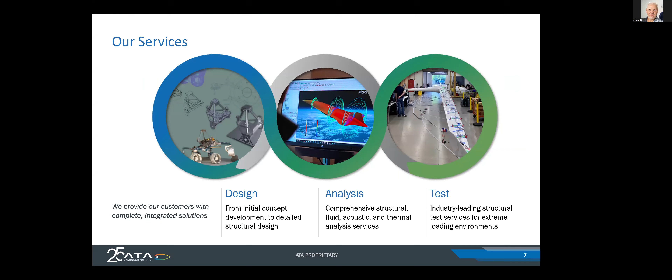And so what do we actually do? Well, we do design, analysis and test at the highest level, and that is how we end up using so many Siemens tools, because they really fall into all of those buckets of usage. We also do a large amount of test services. Ground vibration testing is one of the major areas we focus on, but many others: aeroelasticity, acoustics, lots of flight test work. We have a large test team that will either do it locally or travel around the US and the world, in fact.

And this is an example of a test glider that was actually instrumented in the ATA offices in San Diego. And it was interesting because it actually didn't fit. It had to go through the other door to actually get it in the building.

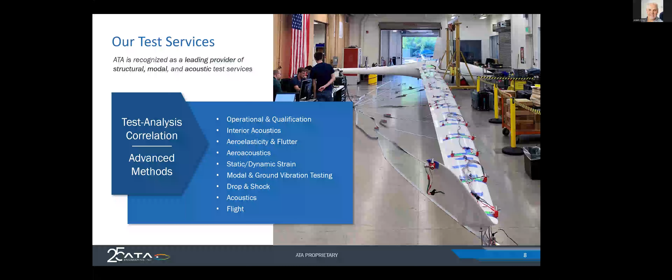So test is a large part of our business, and really was part of the ATA original work that was done when they were within SDRC. But you can imagine that doing all of that, we use a lot of Siemens software, and we've become expert at using it. And so we sell it as part of the VAR business with Siemens. And we also have a lot of people in-house who are experts at it.

So SimCenter 3D, FEMAP, Nastran, STAR, HEEDS, and AMESim, all of the SimCenter tools, together with NX and SimCenter 3D and TeamCenter are all SimCenter products that we support at a very high level within the Siemens group. And really, certainly on the STAR side, we have the most, I would guess, of any of the VAR partners for support. So we have a lot of depth on our bench to really give our customers great support when they're using the SimCenter tools.

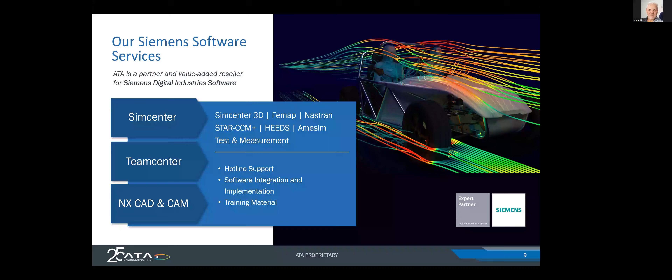So with that, let's move over to our subject matter today, and that is optimization of TPMS heat exchangers in STAR-CCM+ using NX and HEEDS. And so this has come about from customer requests over the last few years of how they can optimize TPMS heat exchangers. And for those who are familiar with that, I'm sure most people on the call are, otherwise you wouldn't have attended,

but they are basically heat exchangers that are very complex in their geometry, but because of 3D printing and additive manufacturing, they can actually now be manufactured. Perhaps 10 years ago, it wasn't possible to manufacture them because of the complex nature of the geometry. But now with additive manufacturing, we can, and hence that gives us new challenges for design. It opens the playing field for much more scope in the design, and hence using NX and STAR and HEEDS, we can really explore that field much wider to get optimized designs.

And so, starting with the basics, I'm sure everybody knows this, but NX is predominantly CAD with some add-ons for analysis and so forth. STAR-CCM+ is CFD, and HEEDS is a product for optimization and workflow automation, and it's really the glue that holds the first two together in this case. And so when we look at NX, why is NX ideally suited to this? And going back a little bit, STAR-CCM+ has its own geometry engine. And hence you could almost do a lot of this work without using NX, just using STAR and HEEDS together.

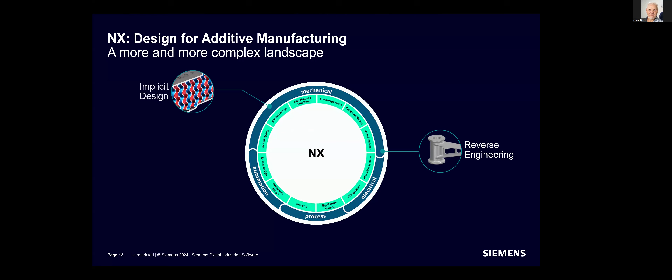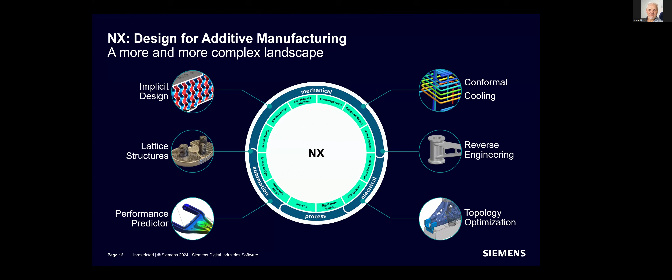So when we look at NX as part of this, you can see that the actual pieces within NX for the design for additive manufacturing really make it ideally suited for this case. The implicit design on the top left, if you had something more complex with lattice structures, you could add that. But really, it's the implicit design and the way that the geometry can be parameterized that makes NX ideally suited for this challenge. And STAR-CCM+, it's the premier CFD tool globally, and I don't think it really needs any explanation except that its capabilities let us do all of the physics in this heat exchanger problem.

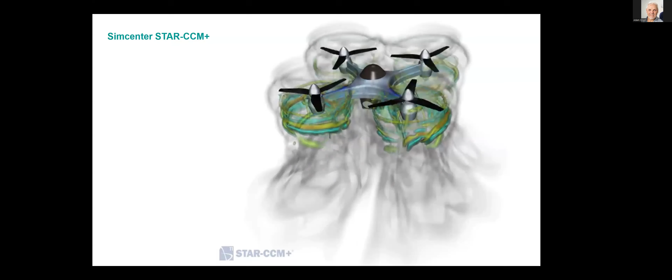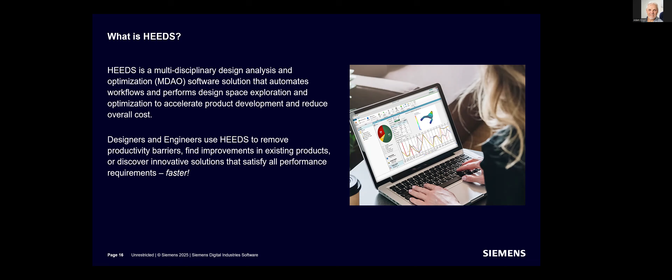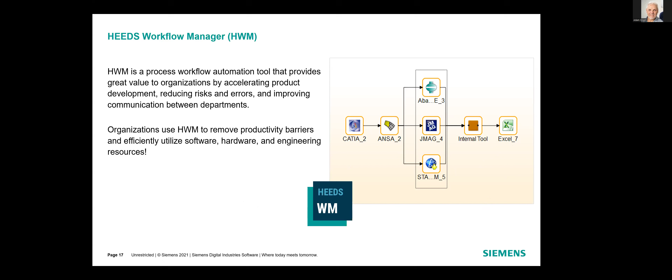And then it can repeat the workflow. It can run this 100 times, 1,000 times, whatever's needed to get to a result that it feels is better. And so when you look at that workflow image, you can imagine that HEEDS can talk to every product on the planet. Not quite, but it can talk to a lot of them, mostly CAE tools. You can see there's ANSA here, there's some Dassault tools, a lot of Siemens tools. Really any tool that is doing analysis, HEEDS can talk to using its own API.

So if you want to control SolidWorks geometry that's going to go into, say, STAR or any CFD tool, HEEDS can control it. So it really opens up the way you can design these things. You don't necessarily need to be a full Siemens house to be able to use HEEDS to wrap around your workflow, and it really makes it very flexible. Those all sound like grand things, but let's look at a quick example of how that might work.

There's a company in Europe called ZF, pretty famous for automotive things and gearboxes. In this case, they were looking at this control arm for a vehicle. The goal was: we've got the CAD geometry, how do we make it as light as it can possibly be, but still satisfy all the load criteria? So obviously automating this to create the right geometry and the right physical status is key here, and doing it as fast as you can.

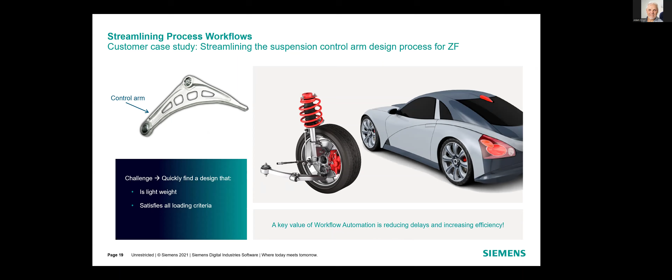So when we look at the flow, the OEM requirements came in. In this first box here, 10 parametric slices were created in the geometry, and those parameters are controlled by HEEDS. It goes into the geometry creation from there. The FE mesh and loads, linear stress, nonlinear, and fatigue analysis are all done as part of the HEEDS workflow until it comes up with a design that is as light as it can be, but still satisfies all of the load conditions in these various simulations.

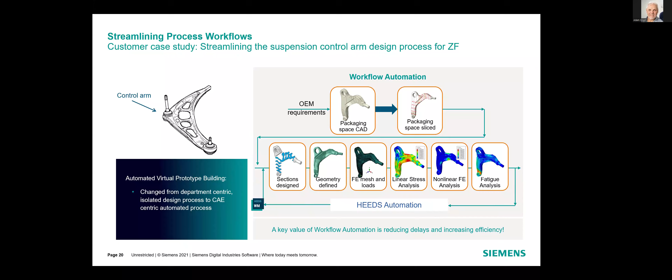So this is quite simplistic. It's one part, and it's really doing FEA but extended, but it still highlights the idea that HEEDS can loop around basically any analysis loop and do things faster than you can do manually. If we look at the result, HEEDS evaluated 1,375 designs and got to the lightest and strong enough piece in under 4 weeks. It was estimated that ZF would have taken over 6 months to do it as a manual process.

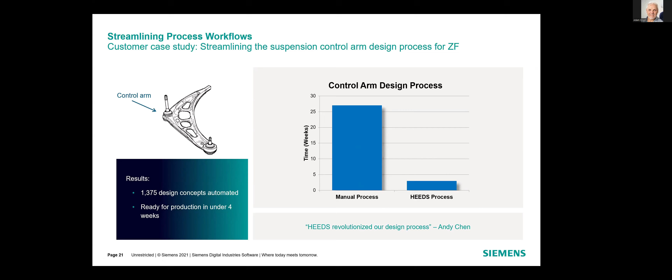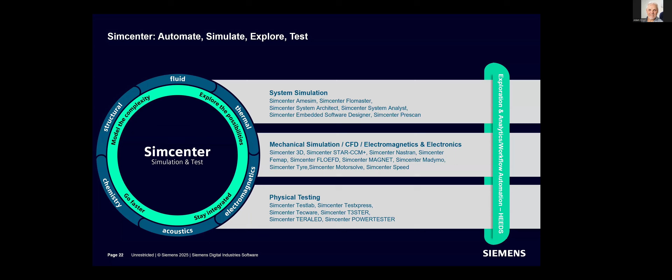So it really highlights the point that, first of all, HEEDS can help you explore areas that you really couldn't get to doing a manual process, and also it can just do things much, much faster. On the Siemens Simcenter side of things, HEEDS can reach across pretty much all domains, from system simulation to mechanical, CFD, and electromagnetics, all the way through to physical testing. So it's interesting to think about which combinations could be effective for any of our clients.

Lastly, when we look at which pieces of HEEDS make it valuable, this first piece of process automation is very valuable because it takes less time to do more iterations around a design loop. Efficient search is the optimization strategy. It lets you home in on the lightest, strongest piece available, and it has all of those algorithms built in. They are tunable if you want, but they're also automated so they just work straight out of the box. They're hybrid; they tune themselves as they go, so the efficient search methods are very good at producing answers without becoming an optimization expert in your own right.

So that's very effective. And then these last two on the right here are almost expected nowadays. Distributed execution: HEEDS can manage clusters, it can manage the cloud. If you want to send 100 jobs to an AWS instance, HEEDS can manage that for you, which is very convenient in this modern day and age. And lastly, the results give a lot of graphical representation, so you can dive into the different parts of the model that govern the result, see why something was better or worse, and move on to deeper analysis if you want to.

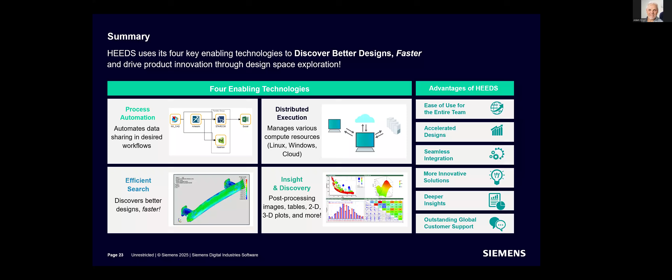So with that, Chris, I'm going to pass the ball to you to talk about using that style of workflow for looking at TPMS heat exchangers. All right, thanks, Adam. Just going to pull the share over from you.

Adam, I sent you a request to share. Can you check to see if you have a little notification there? Yes. I think I'll just stop my share. Okay. There you go. You got it. Great, thank you. Great, okay, can you see my screen? Yep. All right, well, yeah, thanks, Adam.

My name is Chris Stoich, and I'm going to present the optimization of TPMS heat exchanger in STAR using NX and HEEDS. I want to give credit where it's due. Most of the work here was done by my colleague Evan Halls, and I just get the privilege of presenting this cool work.

So yeah, over the past few years, there's been a lot of technological advances in 3D printing, and it really allows the manufacturing of very complex geometries, which is great for heat exchangers where you do want to build something that has these tortuous fluid paths with a lot of surface area. In particular, what we're going to focus on today is the ability to 3D print these triply periodic minimal surfaces, or TPMS, heat exchangers. So I've got a few examples of different types of TPMSs on the right there.

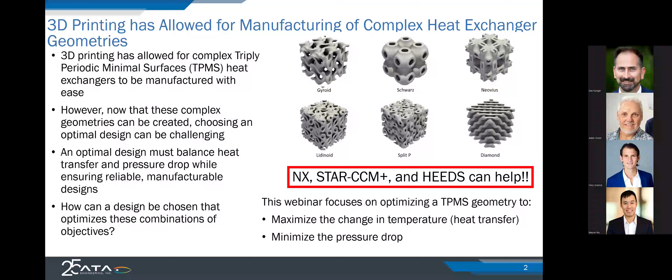So the story starts with NX. Adam alluded to the fact that NX allows you to produce these TPMS geometries using its implicit modeling tool. And it does this with just a few different parameters. So in this case, we've got cell size, that's the size of one of these repeating cells in this lattice geometry, and then wall thickness, and then you've got a number of different types of geometries to choose from too. The one that we're showcasing here is the Schwarz type. And then also you define a bounding box that's going to say how large this array of cells is going to extend.

All of these parameters can be exposed as parameter expressions, which can be used down the line in the optimization. And then as shown on the right here, we've got these hot and cold fluid inlets, and those are created by just using Boolean operations and subtracting those straight fluid streams from the fluid streams passing through the TPMS.

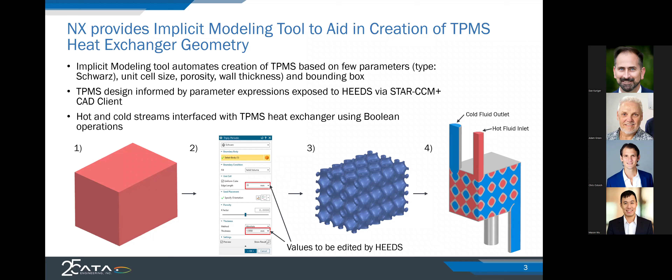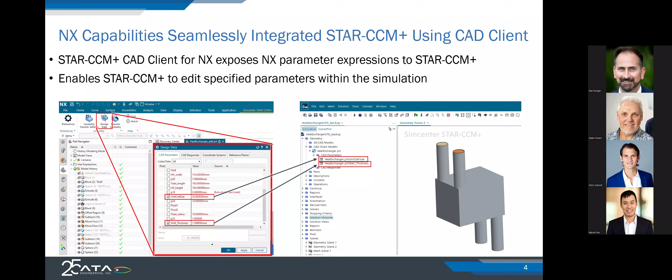So now we move on to STAR. STAR is a multi-physics solver that has everything under the hood. It's got CAD, meshing, a large suite of high fidelity physics solvers, and powerful post-processing tools. In this case, we pull in that NX generated geometry, and STAR's automated mesher builds a mesh on it, creating node matched interfaces at the fluid solid interfaces to accurately capture heat transfer for the conjugate heat transfer simulations. We're using polyhedral cells within the volume, and a number of prism layers on the solid boundaries to accurately capture the temperature gradients there.

As I mentioned, there are a number of multi-physics capabilities. Here we're using RANS steady state flow predictions coupled to the solid thermal predictions in this high fidelity conjugate heat transfer approach. And then there are a number of powerful post-processing tools. In this case, we're setting up reports to measure the temperature change in each fluid stream, the pressure drop, the associated heat transfer, etc. And then we can also look at scenes to really visualize the fluid flow and gain some insights into what is going on inside this complicated geometry.

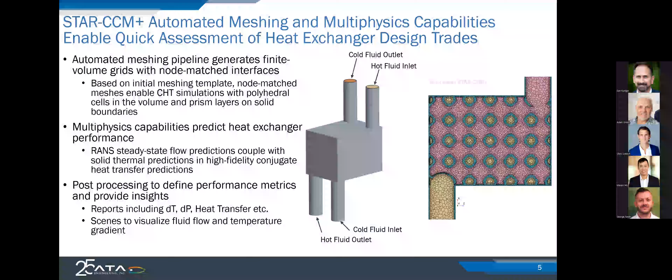So STAR allows you to parameterize pretty much anything. All the fluid inputs are parameterized. So in this case, it's pretty simple. We've got two streams, so we've got the flow rate and the temperature for both of those streams. Also exposed to STAR, as I mentioned, are the CAD parameters through the NX CAD client. So in this case, we're varying that unit cell size and also the wall thickness.

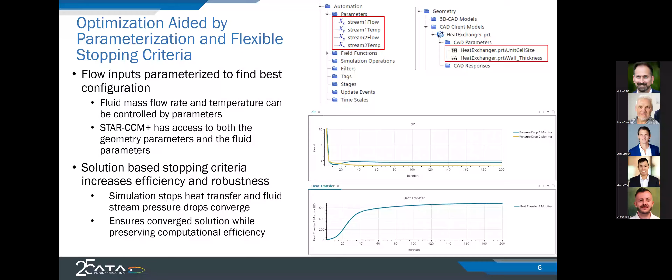Okay, and so we've gone through NX and STAR. HEEDS kind of controls all of this. HEEDS will orchestrate this intelligent design space exploration really by just interacting with the parameters and solution monitors. It's kind of ignorant of the physics that's going on, but it varies parameters, looks at what the response is, and makes decisions from there.

As Adam mentioned, HEEDS is set up to interact with a lot of different software. STAR has a particularly nice portal, which really facilitates effortless simulation setup and communication with STAR-CCM+. So once STAR is hooked into HEEDS through this portal, HEEDS really orchestrates the run, setting up parallelization, the initial condition, everything.

And then, right, so HEEDS is through the portal also given visibility to the input parameters that we care about. Those are listed on the top right, so wall thickness, flow rate, unit cell size. We also put temperature in there, but we are not varying those in the optimization, but it just allows us to make parameter changes within HEEDS if we're interested in a different condition. And then below that, STAR makes visible to HEEDS the simulation responses. So that's pressure drops, heat transfer, the temperature changes within the fluid streams.

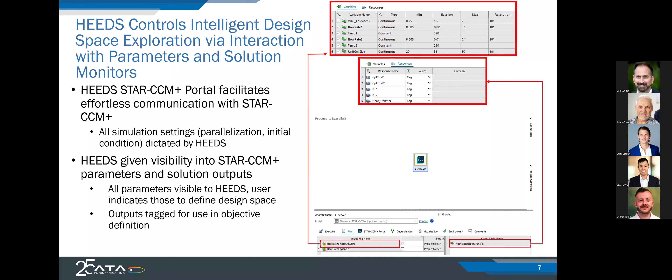So once we push go, HEEDS uses this proprietary MO-SHERPA algorithm for multi-objective optimization. In this case, I mentioned that the objectives that we care about are heat transfer. We want to maximize that, and pressure drop, we want to keep that as low as possible in each of the fluid streams. Some additional inputs that we can use to satisfy our optimization and computational constraints are the number of evaluations we want to run. In this case, we ran 500 evaluations, so that's 500 different design instances, and archive size. Archive size is a little bit less straightforward. It really defines kind of the resolution of a Pareto front in a multi-objective optimization.

You can also weight objectives differently if we know we care more about heat transfer than pressure drop. And then also some smaller considerations like storage constraints. HEEDS can save the input files and results from every design iteration, but that can get pretty storage heavy, and so you can tell it, hey, I only want you to save the best one, or the ones that also failed, so I can look into those, and HEEDS allows you to do that.

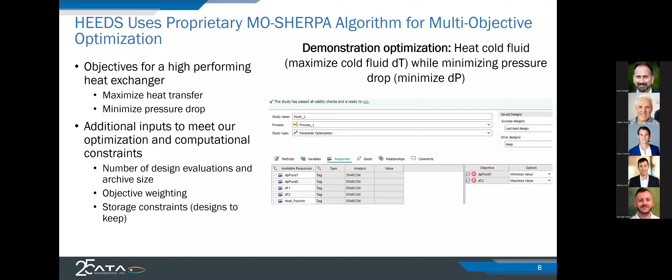Okay, so here is kind of the orchestration of this optimization that we ran in HEEDS. This 500 design optimization ran over a weekend on just a desktop machine. You can see that 347 designs were successful, and there were 153 error designs.

This is one of my favorite features of HEEDS because it has this built-in fault tolerance, and I like this because I don't have to log in during the weekend and see if my chain of simulations was interrupted by one failure. I know that HEEDS is going to look at a failure and say, hey, this may have failed due to some impossible geometry that we asked it to create, or some cluster hiccup or something. Whatever reason it has, it's just going to say, okay, we're going to skip this one and move on, and progress through the optimization. And so that is excellent. Gives me a lot of peace of mind so that I can do weekend stuff and not simulation stuff.

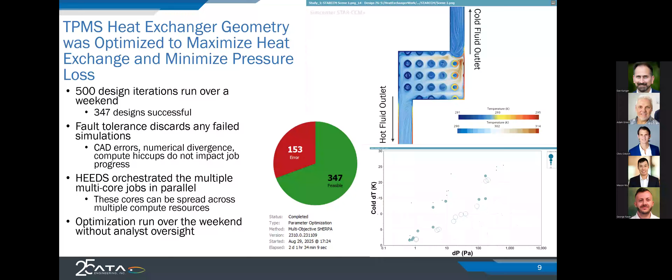This particular job ran each case on 4 cores, and ran 2 cases in parallel. You can change that configuration however you'd like based on your computational resources. And again, yeah, this ran over the weekend without myself or Evan worrying about it.

And so once the optimization is done, HEEDS generates this Pareto curve. So if you're not familiar with the Pareto curve, it is the curve along which you can't increase the goodness or improve one objective without decreasing on the axis of the other objective.

So here we point out a number of designs that lie along that Pareto curve, and each of those is, I guess, optimized for that particular portion of the Pareto curve. So it's really up to the engineer now to choose, okay, which of these optimal designs do I want to build, which satisfies kind of my requirements most.

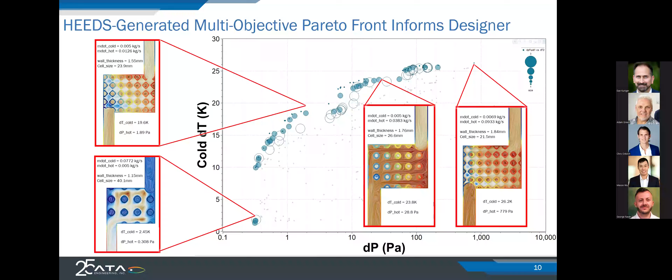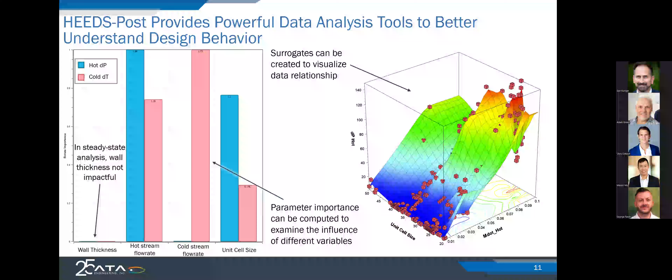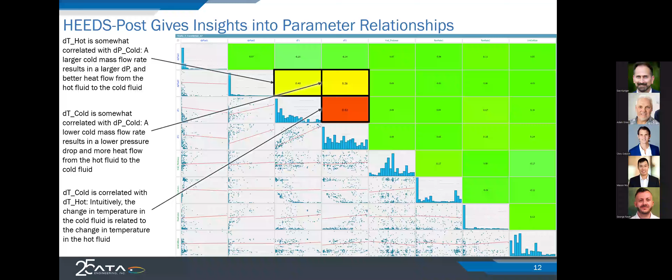One additional thing that I'd like to talk about that we did not use here in this project was the HEEDS AI simulation predictor. And so this could have accelerated our process even more. What happens here is that each of these simulations that we ran for the TPMS heat exchanger took some amount of time. It was a real simulation and took time. What the AI simulation predictor might have done is run 100 simulations and then started building a model from that, from which it could start generating AI predictions to kind of fill in the gaps there, but much more efficiently.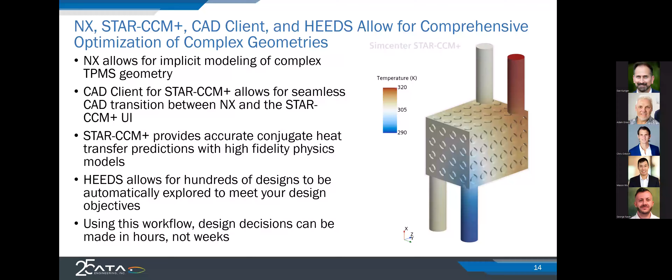One thing I wanted to mention was that on the HEEDS AI predictor piece, could you go back one slide? So basically, HEEDS AI uses real simulated points to build an AI machine learning model, and then it makes decisions based on that. But once it's made decisions, if there's any points that turn out to be very good, it will go back and rerun those as actual simulations. So it's using AI, but it's using it in a very safe way because it's not as if a point that might be identified as optimal is only generated with AI. It actually goes back and does the full simulation. So just to make us feel confident that AI does work in this context. Right. Yeah. Good thing to point out, Adam.